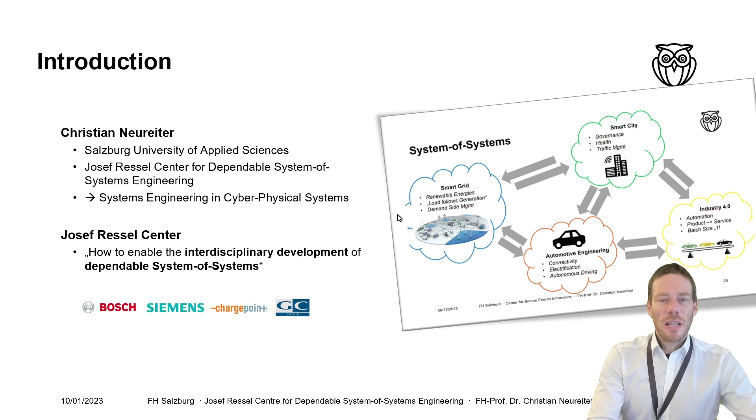The learning goals for this particular lecture are to understand the motivation behind it, so why are we thinking about how to develop dependable smart grids, and what are the challenges. Then we would like to introduce some fundamental concepts like model-based systems engineering as methodology, or mindset even, and the smart grid architecture model as theoretical grounding of all this work. The third learning goal is that you understand how we are going to apply the SGAM for smart grid architecture development.

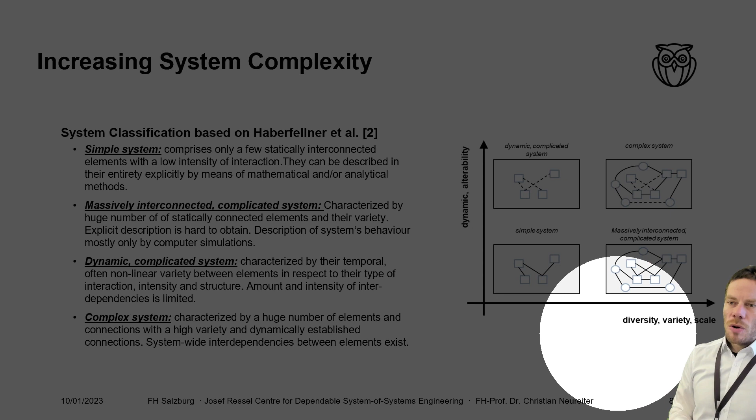On one hand, they consider dynamic and alterability of a system, meaning do we have a stable system structure, or a topology that changes while in operation? The second axis is diversity, variety, and scale, meaning we consider the size, amount, and diversity of the constituting systems. On this basis, we can separate between four different systems: simple systems, two different types of complicated systems—the massively interconnected ones and the dynamic ones—and finally complex systems.

I'm talking about this because this is not just a scientific classification, rather this is a fundamental separation that should guide us in choosing our development approach. This means the classification of a system is the basis for selecting how to approach the engineering task.

For example, let's consider a simple system—let's say we have an electric circuit, like a low-pass filter or an oscillator. Then, with analytic engineering know-how, we are able to make a prediction on some bandwidth frequencies or anyway.

So the idea is, if it's a simple system like a small electric system, we have engineering know-how and we can deal with it. But if we think about a bigger system, like the whole power grid, then probably it's pretty hard to make an exact calculation on the exact voltage at the outlet right now with two digits after the comma.

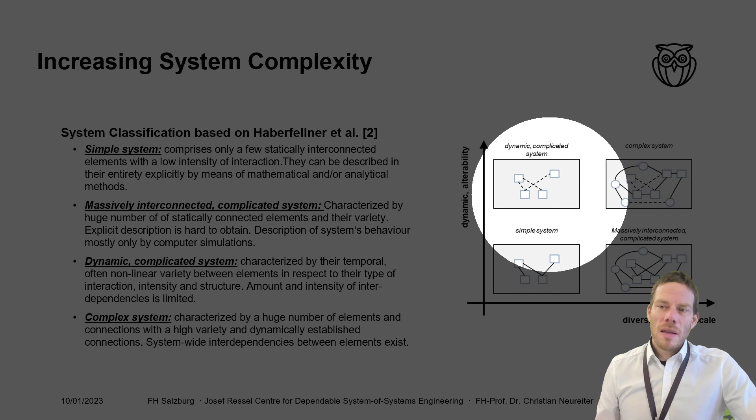If we go in the other dimension, we could think about an ICT-based system where we have mobile clients communicating with a server. The difference to our power grid is that the power grid, as we know it today, has a pretty stable structure, so it doesn't change every day where the wires are drawn. In contrast, our ICT-based system, like a mobile phone with an app and a backend server, has permanently new connections and disconnections of existing connections. So our structure is not stable in that context.

That's what we call a dynamic system, where we have to consider different changes, like load balancing, update services, and so on. Again, the classification of the system helps us indicate the challenges we have to face. Now, if we consider our power grid again, and assume we have dynamic connections as well, like electric vehicles connected one day and disconnected the next, or even the significance of individual connections, like how much energy is produced from some renewable source, then we are approaching a complex system, which raises the question of how to deal with complexity.

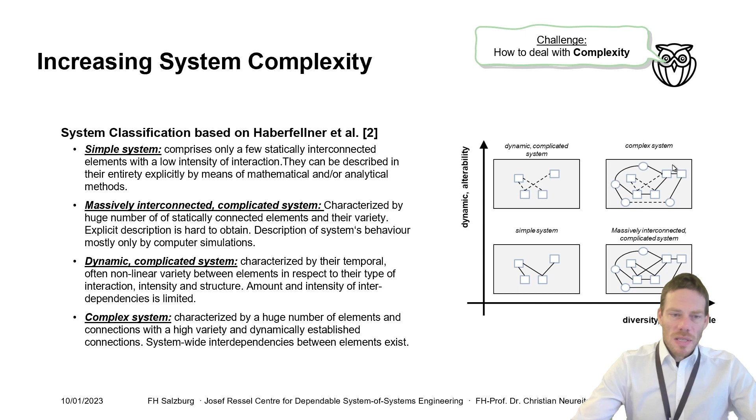To make it a bit more challenging, the example I've chosen, the power grid, is not only a complex system, rather it can be characterized as a system of systems. And the system of systems as such is characterized by the so-called Maier-DeLaurentis criteria. So the idea is that we have individual systems, like for example a power grid and a vehicle.

These two individual systems agree that together they would like to achieve a higher goal. For example, let's say we want to improve our environmental protection. We would like to increase the share of electric vehicles, and we would like to achieve a better utilization of the power grid to enable more electric vehicles to participate in the grid. Now, that's our superordinated purpose - we would like to improve the grid as a resource to enable more vehicles to be part of this game.

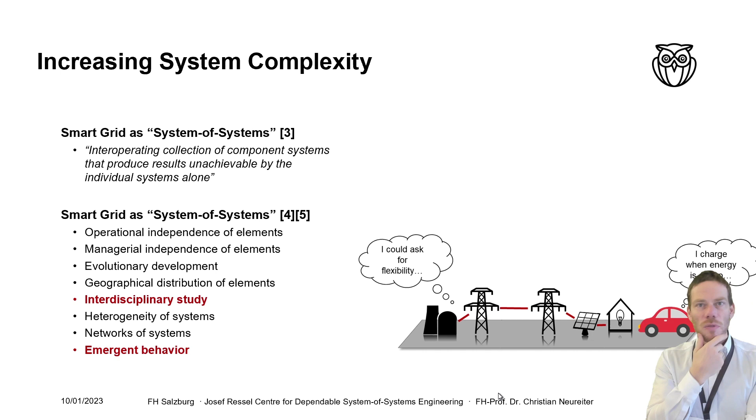So the power grid and the electric vehicle have to move to the side a bit. They could decide on something like, let's use flexibility. The power grid says, when I see that I'm running short of my grid resources because too much power is consumed or something, then I could ask some of the participants in the grid, like the electric vehicle, for flexibility. And the vehicle on the other side says, if I'm connected in the evening at my parking lot, I only want to be fully charged in the morning, but it doesn't matter if I'm charged at 2 o'clock in the night or 3 o'clock in the night. So I could offer flexibility for a better price.

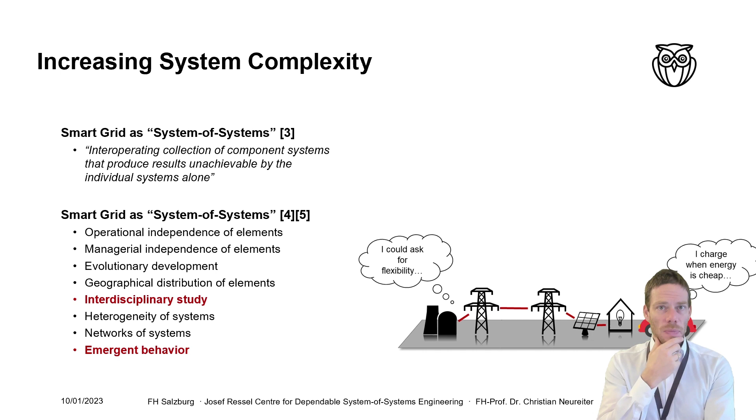So this is the basic agreement between the power grid and the vehicle. The power grid says when I'm running short on grid capacity, I'm asking the car for flexibility, and to motivate it, I will offer a better price. That's what we call an incentive. So we have a good agreement, and that would work to improve grid utilization. But that's only half of the truth.

In reality, let's imagine a scenario like this: let's say it's 6 o'clock in the evening, I come home with my electric vehicle, and I put it to my charging station. The car is charging, everything is fine. Then it's 8 o'clock in the evening, everyone turns on the TV, maybe it's cooking, energy consumption is rising. The power grid says, I have a pretty high energy consumption right now, let's increase the price. My vehicle recognizes the increase of the price and says, I better stop. I make a pause, I go on hold, and I wait for a better price before I continue charging. Everything is fine.

At 8:30, my wife comes back home, and she also has an electric vehicle, and she puts it to the charging station. Her vehicle detects that the price is pretty high at this moment, and it goes on hold, saying let's wait for a better price.

Then at 9 o'clock p.m., my daughter comes home with her electric car. She puts it to the charging station as well, and again her car realizes the price is high and says let's wait. So right now we have 3 electric vehicles attached to the charging station, waiting for a better price.

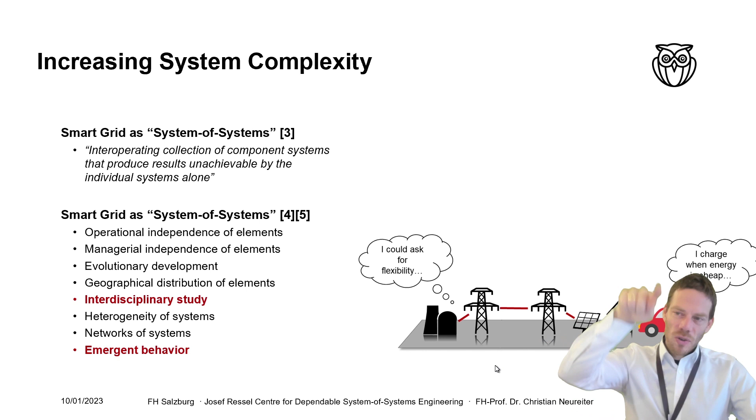So what we see in the end is an oscillating behavior that we definitely don't want in the power grid. This is what we call an emergent behavior—no single producer of this behavior, but it's something we observe in the context of a system of systems. This is exactly what we need to deal with when our system is characterized as a system of systems.

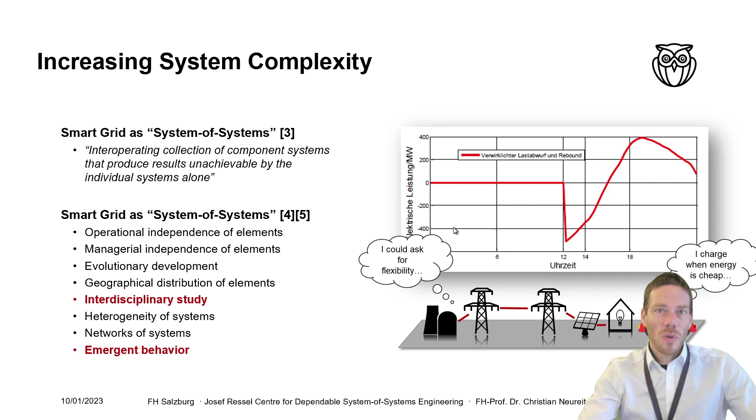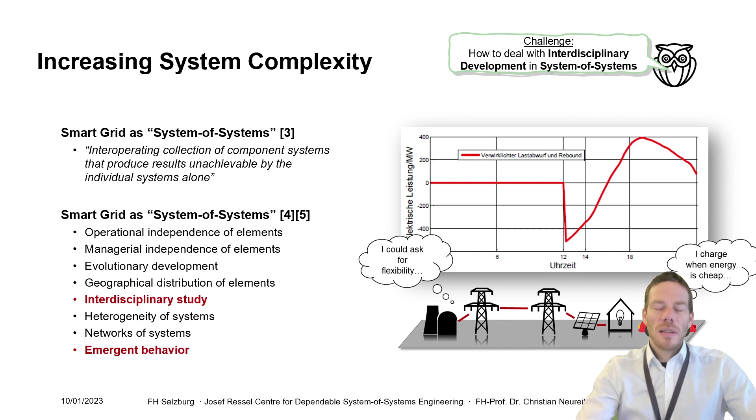Why is it so important to handle this? The superordinated goal, as I mentioned earlier, is that our power grid is a so-called critical infrastructure, and as such it has to maintain pretty strict dependability requirements. Dependability itself is just an umbrella term covering reliability, availability, maintainability, safety, and security. In context of the power grid and many other services today, we also suggest maintaining privacy, or considering privacy like data protection in this context.

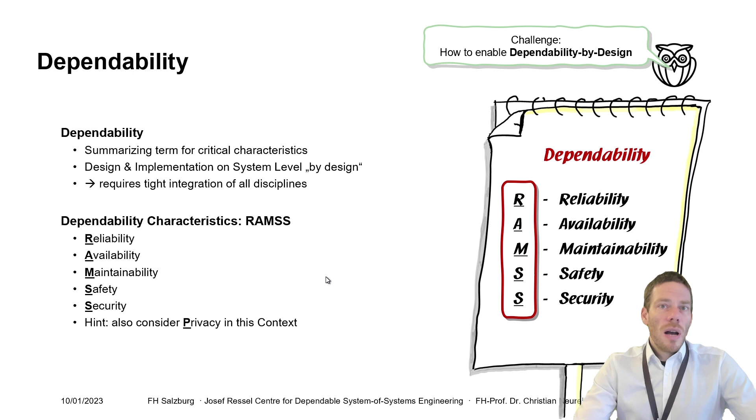So what do we have so far? We have learned that the power grid is a complex system, or even a system of systems, and that this system needs to maintain strict dependability requirements. Now we want to take a look at how to deal with complexity in general, to derive an approach for handling complexity in engineering of power grids.

This can be argued on the basis of something called Miller's law, developed in 1956 by a psychologist from Harvard. He developed a so-called magic number, identifying that our brain has a cognitive capability of around 7 elements that we can process at the same time.

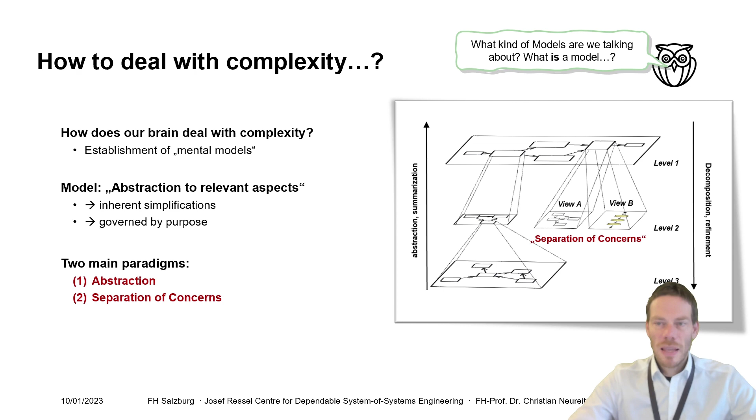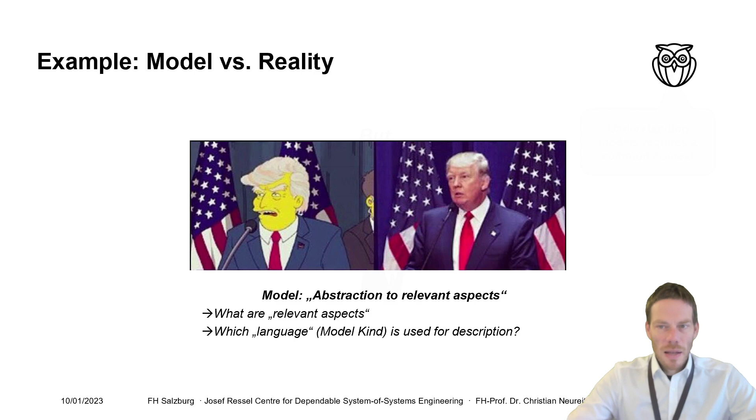To say it, it's Richard Nixon, a former US president, taken from The Simpsons. The first one probably you did recognize, the second one you didn't. And the answer why this happens is that understanding of models always requires a common context.

A model requires interpretation, and the way interpretation works depends on the context. The context could be, in an engineer's case, your age, your daily experience. Donald Trump plays a role in the daily news, not so much anymore, luckily, but Richard Nixon doesn't play a role. So in our life context, Donald Trump is recognized, Richard Nixon isn't.

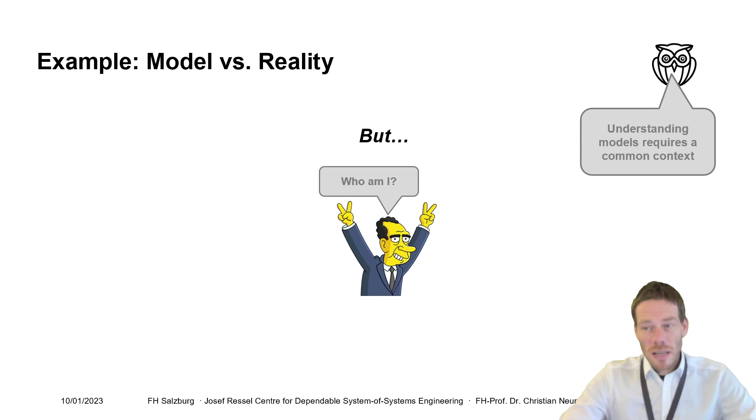And the same thing is true for technical models. If we think about engineering models or models in general in the smart grid, we realize that there are many different models being used. We have physical models like electrical models, or control systems models, architecture models, maybe UML and SysML. We have maybe some enterprise architecture, some context models, and so on.

But what we already can draw out of this is that whenever we want to apply modeling to deal with complexity, we first need to answer the question: which types of models are suitable to be used in the different contexts that we see here? Or is it possible to find one model that is usable for everyone?

So we already learned that models are a good approach to deal with complexity, but now we have to answer the question, which kind of models, which type of models? Is it something new, something everyone needs to learn, or how can we approach that? To answer that, I first would like to go to the whiteboard and make some initial discussion on some fundamental aspects of technical models. So let's move over to the whiteboard.

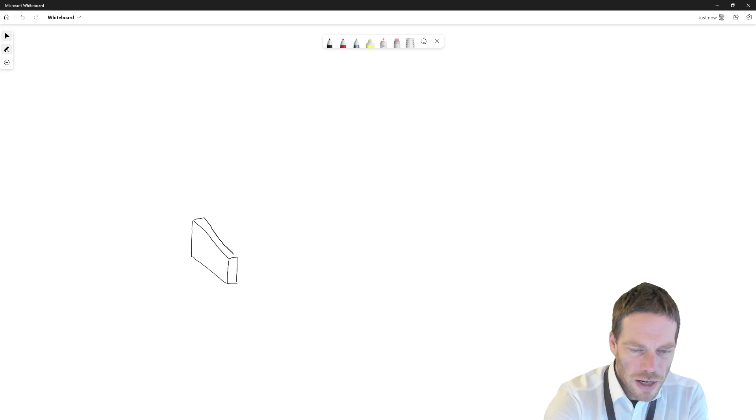I just make a sketch. It's already a model—it's the abstraction to relevant aspects. Not very pretty, but I think you get the idea. And this is a wall. Now we want to understand how much energy we lose.

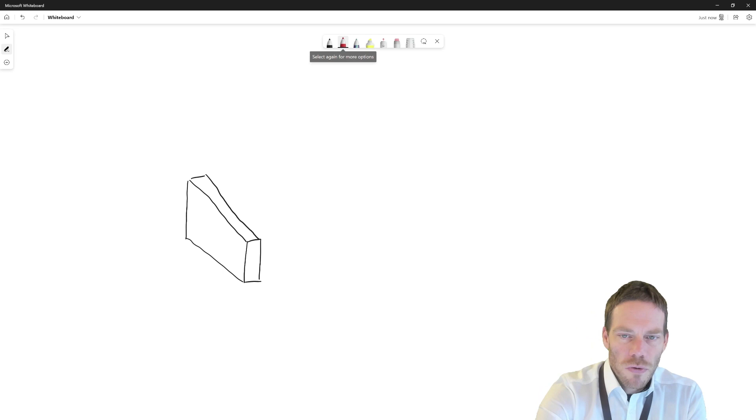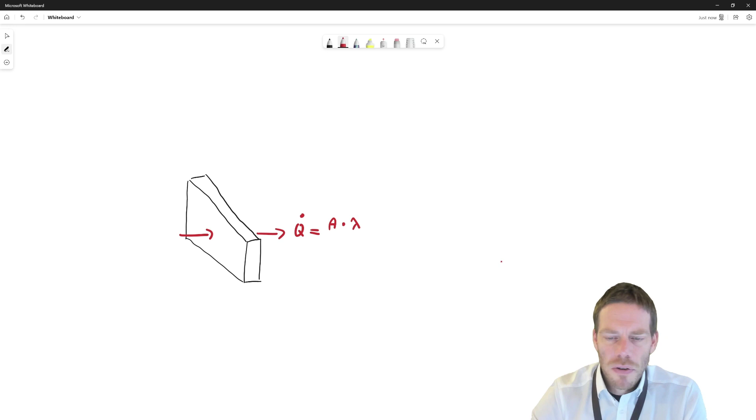First of all, we need to find the cause-effect principle, which in that case is a stream of heat going from the inside to the outside. Now we need to understand how much energy we are going to lose. A specialist, a civil engineer, could say the value or amount of heat we lose is determined by different factors: the area of the wall, some material-specific constant, some disturbance here which is the delta of the temperature, and maybe the thickness of the wall could play a role.

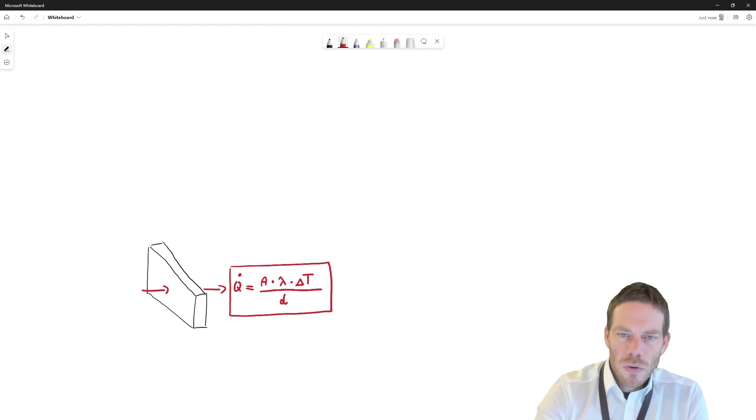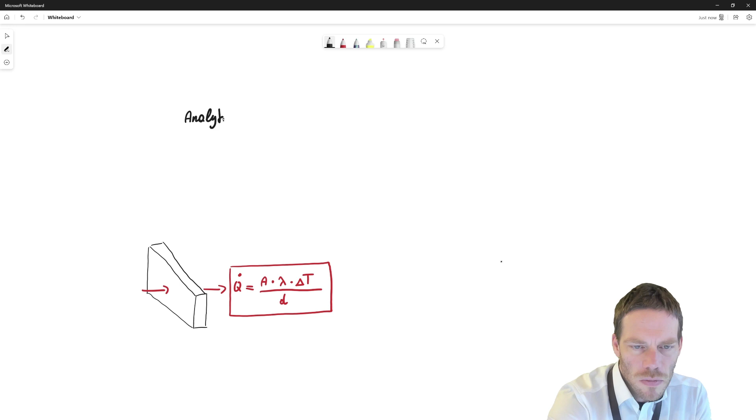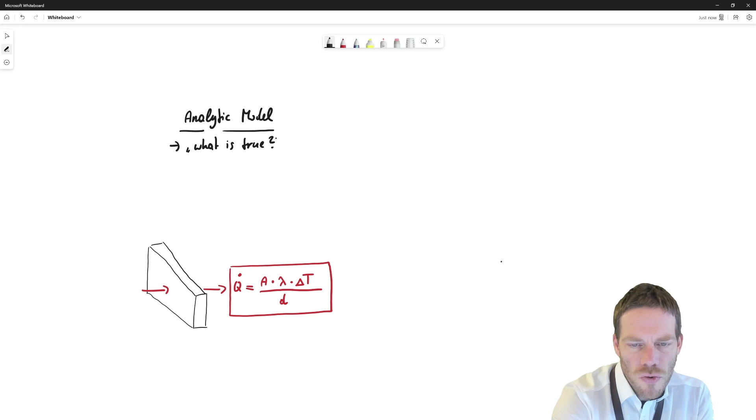And all in all, now we have a model of how much energy we're going to lose. This type of model that we use here has a name—it's called a so-called analytic model. And this analytic model tries to answer the question: what is true? True in the meaning of, is my model representing reality?

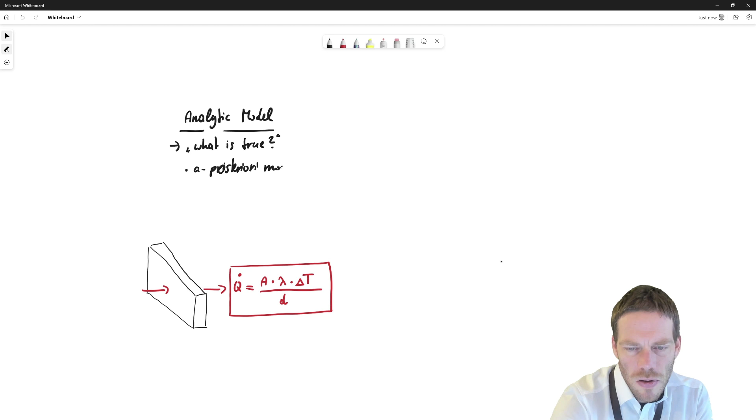So I propose a model, and then I can verify it in an experiment, or rather go into a simulation. That's how we are developing our analytic model. This type of model is also called an a posteriori model, because it is established after an effect already exists—we try to describe an existing effect. You also can call it a so-called descriptive model.

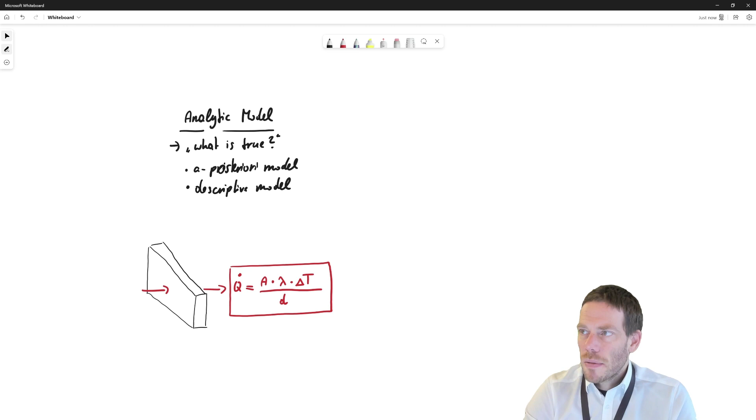As it describes something, okay? And that's the one thing. Now let's move on.

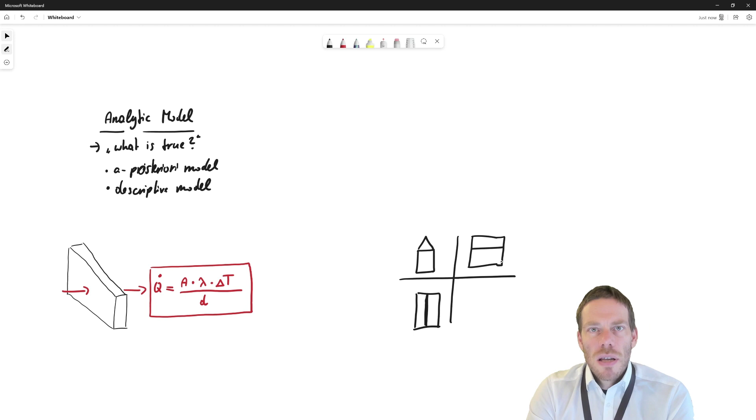This model brings us to the question: can an architecture be right or wrong, true or false? The answer is no, because we find different architectures that would fit the same purpose. So we cannot judge if the architecture is right or wrong, we can just judge if an architecture meets our purpose, and that's what we call the effectivity.

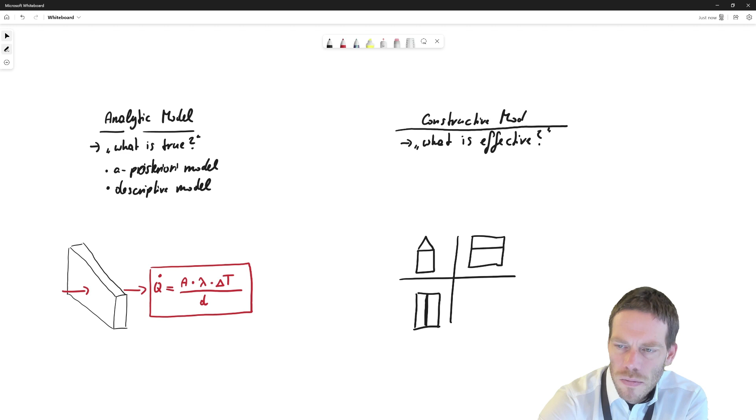As there is a creational task involved, we plan to create something, and for that purpose we make a model. This one you also could call an a priori model, because the model is created before our artifact is built, or a declarative model, because it's a declaration that everyone involved in the construction needs to follow.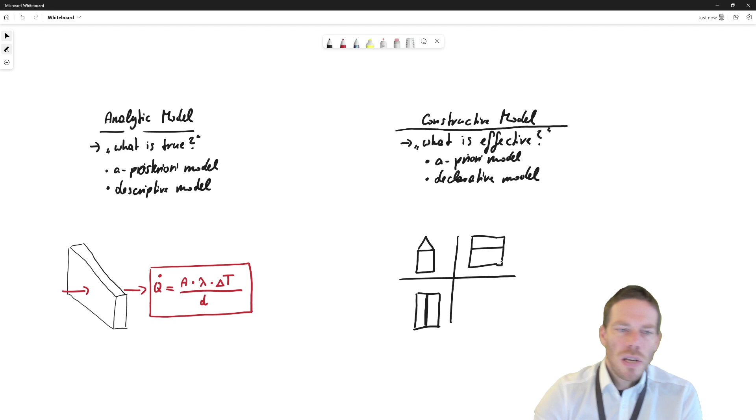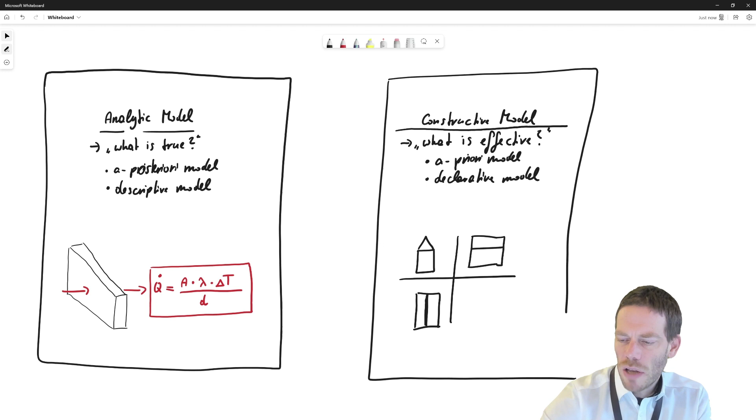So what we found here already, on basis of the simple example, is the fact that we have two different types of models that are used during construction. And if we think back to the question for the architecture: is the architecture good or bad? Does it meet our goals? Then how can we understand if this particular architecture is good in terms of energy efficiency? Is there a lot of energy going out through the walls or not?

The answer is very simple, because we can simulate, for example, our construction plan in respect to its thermal behavior. And this simulation is nothing else than the application of our previously developed analytic model. So we already see the following: we have different types of models here. We have the analytic model that helps us understand the particular cause-effect relationships, and we have the constructive model that is the basis for our plan, so what we want to build. And there is an interaction...

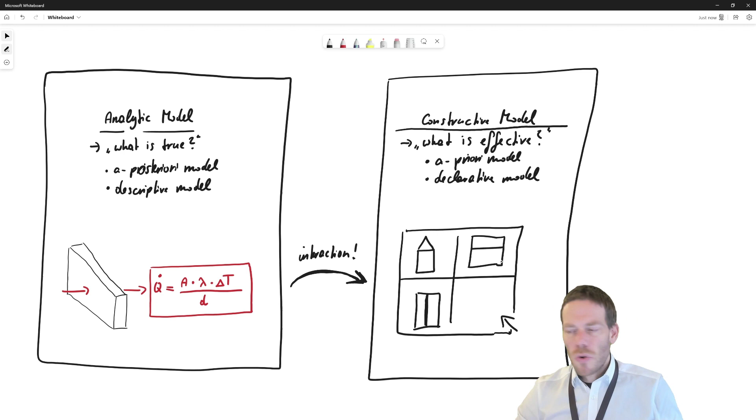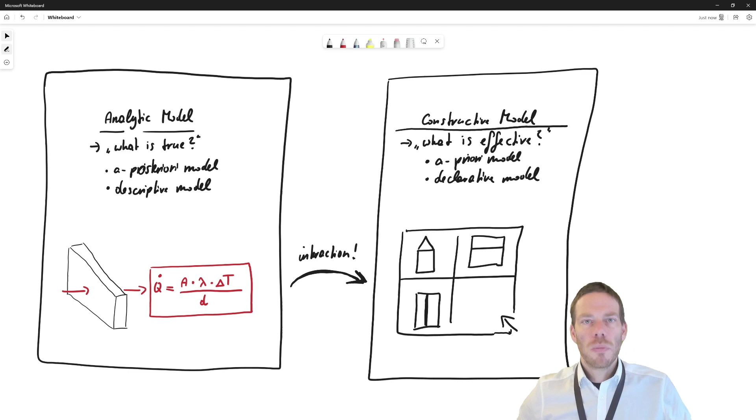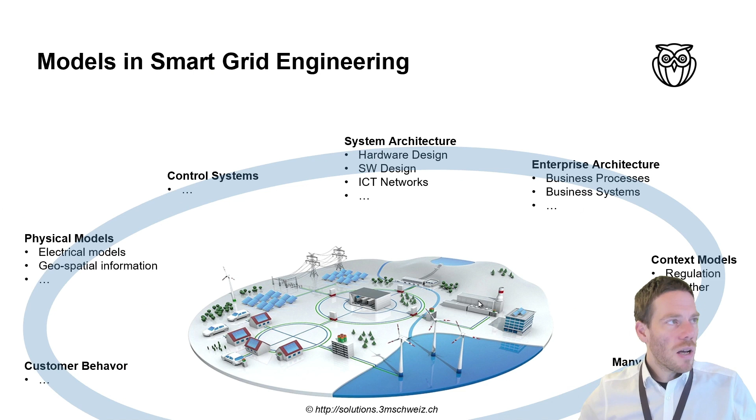...between the different models. So this already indicates something very important: probably, even though models help us dealing with complexity, it's not about having one model. Probably it's about having different models and finding their interaction. And with this knowledge, let's take a closer look at how such an interaction could look like.

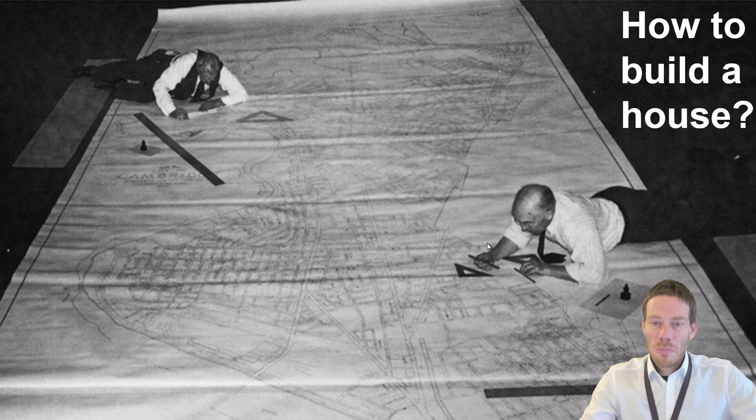To identify how something on that level could look like, let's go back to the analogy of how to build a house. You remember, in ancient times, people were planning houses or cities like this. Today, typically, we are no longer drawing with pen and paper; rather we are using CAD, computer-aided design tools. And here, maybe we can find some answers. So let's take a look at how modeling of buildings works.

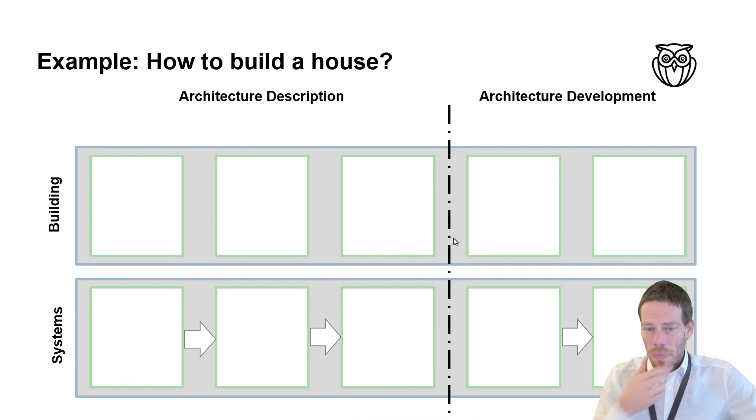First of all, what we need is an agreement on different views that are needed for the development of our houses, like, for example, as we mentioned before, the architecture views in the house cover typically the front view, the side view, and the top view, roughly.

And further, we want to integrate different aspects depending on the particular concerns. Like, for example, we could use some models for electric wiring or for the installation. And these symbols follow a particular terminology - that's what we call a model kind. So we have the views already, which build the frame, like the top view, and then we have the integration or the depiction of the views on basis of model kinds, which is a common agreed taxonomy. And in the end, we don't want to use pen and paper because that comes with some difficulties.

Like, for example, let's assume we have this house and now we want to change this particular wall - this would be the thickness of this wall. This would require us to find every single picture where this wall is depicted and change the thickness in every single picture, like here, here, or here. And with 3 pictures, this is pretty simple. But in a real project, if you have 300 or 3000 pictures, then drawing could be pretty difficult.

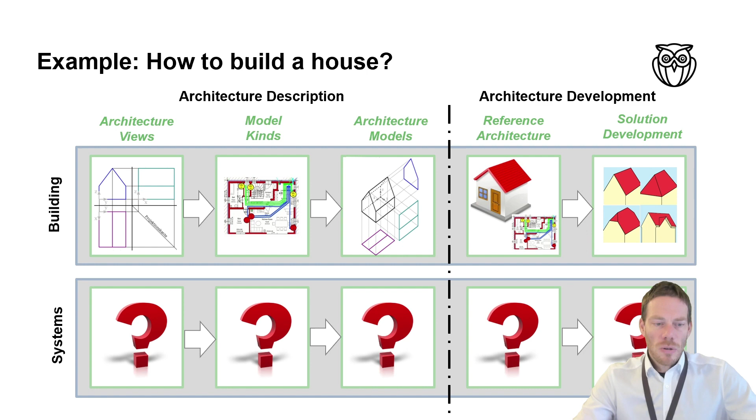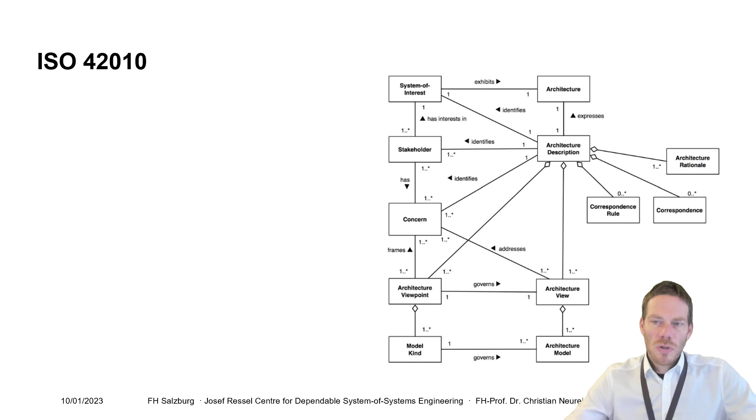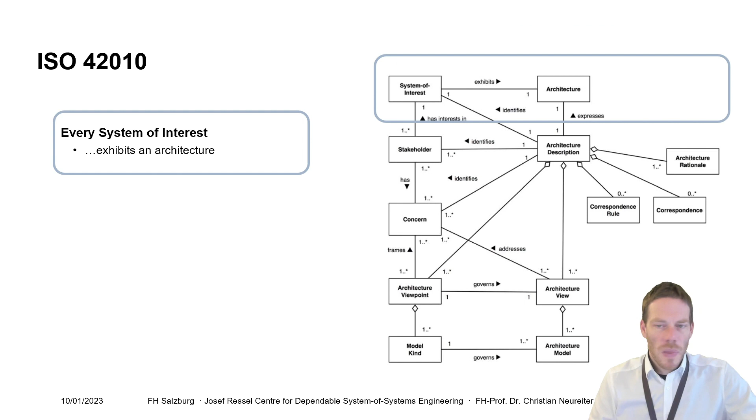And this picture in a more formal way can be found in the ISO 42010, which is basically the ISO standard for software and system architecture. And this gives us a very good indication how we could proceed on the search for such a model. So first of all, what we agree on is that we have a system of interest, and every system of interest has some particular architecture. The second thing is we raised the question how to describe our architecture. That's exactly our question. And then we can follow this path.

We understand that our system of interest has particular stakeholders. And every one of our stakeholders has a particular concern. So we need to understand what is everyone interested in. And on this basis, we can specify a certain architecture viewpoint, and we can further elaborate which language do we use to illustrate this viewpoint. This could be a set of graphical symbols, such a model kind.

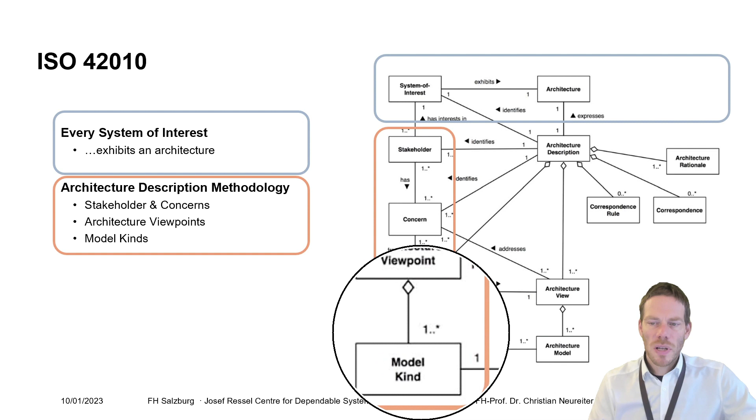For example, if we go back to our house, we could say I have the stakeholder who is the electrician, and our electrician has the concern - he wants to know where to put the wires in. So I specify there is a viewpoint: electric installation. It's a chapter in a book or whatever. And the description of this viewpoint, the realization of this viewpoint, is based on a certain model kind, like the standardized symbol for electric elements used in construction.

And so we made a declaration how we are going to describe architecture on basis of the particular stakeholder needs that we have. And in the realization then, the particular design takes place, which is based on an architecture description. And this architecture description comprises different views on basis of the described viewpoints. And every view comprises a set of models.

In that case, it could be a set of electric schematics. They follow the notation specified by the model kind, like the standardized schematics and symbols that we know for an outlet or a light bulb or a switch.

Yeah, and that's the way how we proceed. That's the guideline how we can start identifying models for the smart grid. So in our case, this means what we have to do now is think about, for our system of interest, the smart grid, which stakeholders do we have and what concerns they come along with, and how could we start depicting these different concerns. And that's what we do in the next chapter.

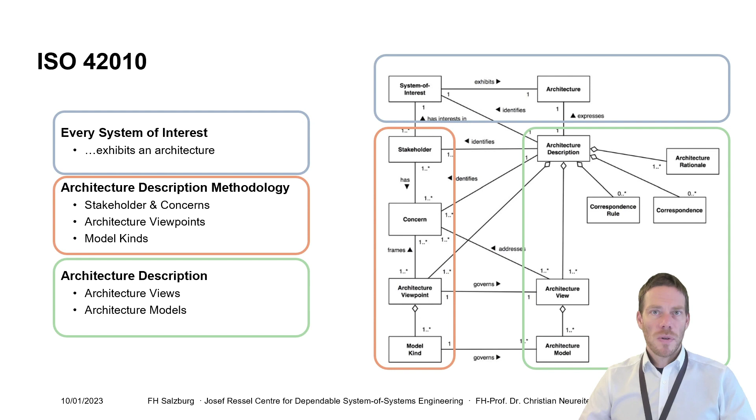Everyone who ever tried to develop a domain-specific language knows that the most difficult task is to find a common concept for communication. So if you have many stakeholders and maybe their communication is slightly different, then this can be a pretty tough task to be solved.

In the case of smart grid, when the quest is to find a common concept for communication, we have a lucky punch because we don't need to find or elaborate individual concepts, because we are very lucky to have some concepts that originate from standardization bodies. And this brings the benefit that it is already agreed on. So we don't need to discuss if we make it one way or the other. If we have a standard, then we already can say, okay, that's the basis for communication.

So let's take a closer look at the smart grid architecture model, because this is something that can serve as a basis for common communication.

So first of all, let's talk about the background. The background is coming from the idea that when in the smart grid, the electric domain and the telecommunication or ICT domain are being integrated, then probably it's also a good idea to align the standards from these two domains to make sure we don't have gaps in standardization or some contradictory standards. So just to ensure that the standards are compatible with each other.

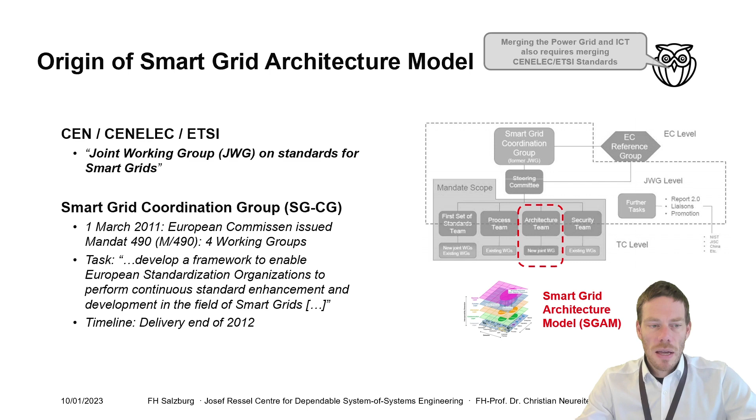First of all, we had one concern, which was the decomposition of the problem domain, the power grid. For this decomposition, the guys from this working group referred to the NIST conceptual model, which is the basic and well-agreed decomposition of the power grid. So we have generation, transmission, distribution, and in the end, customer premises. The guys in the working group added one more aspect, distributed energy resources. This is the only change they made. But basically this is the decomposition of the power grid from the huge bulk generation down to the customer.

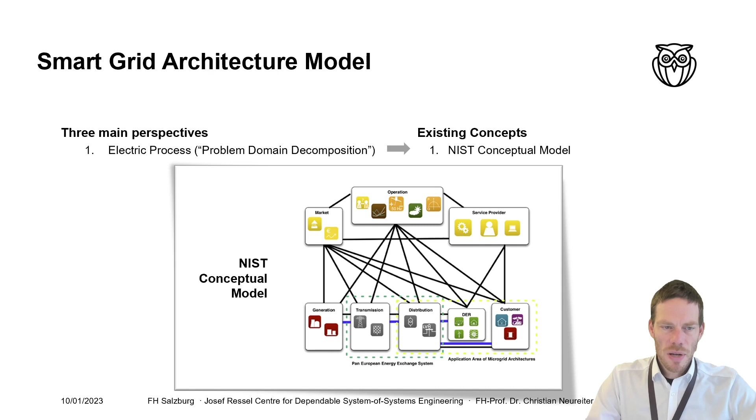Then in the NIST conceptual model, there were three operational aspects: service provider, operations, and market. And this aspect of power grid operation, how to control this electric infrastructure, has been further reflected on the basis of the so-called SCADA automation pyramid. This automation pyramid is a very widely spread concept from industrial automation, and it separates the different stages of process automation.

So what we have is on level 0, we have the sensors and signals that are close to the process that we want to control. We have programmable logic controllers, which are pretty close to the process. Then we have a superordinated SCADA HMI, then the manufacturing operations management, and the enterprise resource planning and logistics. So that's the typical topology that we see in automation technology.

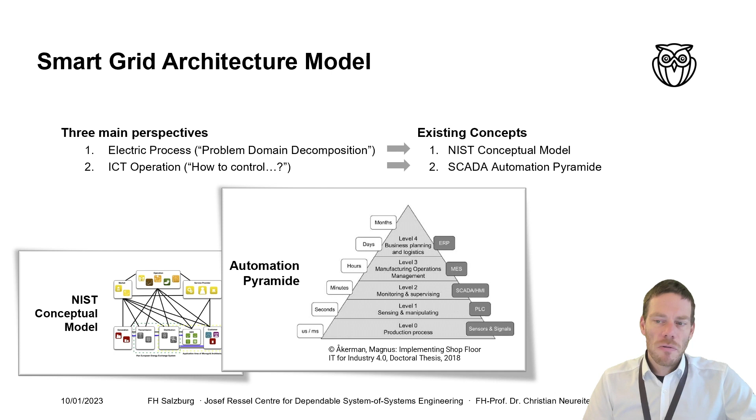And the third aspect considered in this context is the question of interoperability, which means how to make sure that two components in the power grid will be interoperable with each other. Here they use the Gridwise Architecture Council's interoperability stack, which basically states that interoperability needs to take place on different levels, like the basic connectivity - physics, network and syntactic interoperability - all the way up to regulatory policies and economic codes. If you take a closer look, you will find some similarities, for example, with the ISO OSI stack.

The idea of considering interoperability on different stages is nothing new, that's well established. And well established is already one of the key aspects here. All of these three aspects that state the basis for consideration are well established, so you probably won't find many people in the energy domain that would discuss any one of these things and re-ask if that's a good thing, because they are established, they are working, and most people are familiar with it. So this looks like a good basis for developing an architecture reference framework.

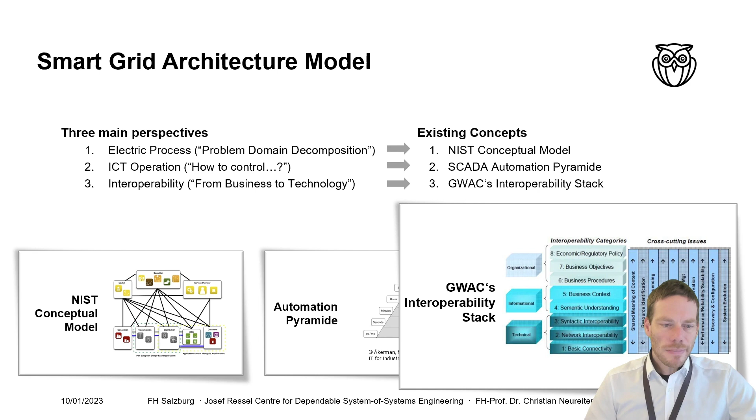Let's take a look at what people from this working group did. First of all, they combined the NIST conceptual model with the automation pyramid. If you take a look at the outcome, it's the smart grid plane that you can see right here. In this smart grid plane, we have a grid pattern which on one axis decomposes the power grid from the huge generation down to the customer premises.

That's the process that we want to control, the energy conversion chain. And here we have the control axis, which is basically the hierarchical level of power system management, meaning the ICT-based equipment and human interactions that are controlling all these individual systems. These two things combined, the process we want to control and the ICT that is controlling this process, there is already value inside.

Because what you can do now is take any equipment in the power grid that you have and align it inside this grid pattern. By having a particular position inside the grid pattern identified, you can already draw conclusions like, for example, on this side we probably have a higher need for security, and on this side we probably have a higher need for privacy. So the position inside the grid pattern indicates requirements for your systems.

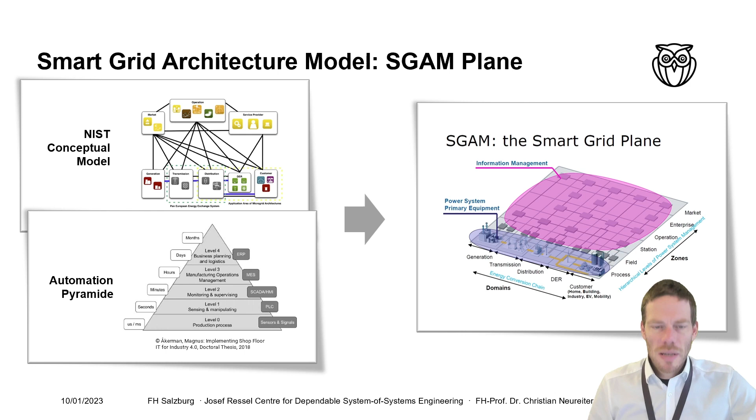The last thing missing now is the topic of interoperability. We want to ensure that if, say, company A makes this element and company B makes this element, there is compatibility between them. The last thing the guys under the mandate from M490 did is they added the GWAC's interoperability stack with a bit of digestion, and they finally stated that interoperability between two elements must be given on 5 layers, which means of course the physical components need to be compatible, and the communication layer must fit, using the correct and same protocols.

Then we have the semantics layer, the information layer, which ensures interoperability of the data models being used. Then above we have the functional layer, meaning the functional interaction needs to fit. On top of all that is the business layer, which guides the business objectives or political regulation, making sure two systems will face the same regulations and nothing contradictory.

With this, what we already have is one common picture which is used and everyone can agree on. It's very simple, very understandable, and already gives us a good basis for depicting, structuring, or architecting smart grids. Though this one has been made to identify and align standards and gaps in standardization, this framework is already very valuable to structure a whole smart grid application or a power grid.

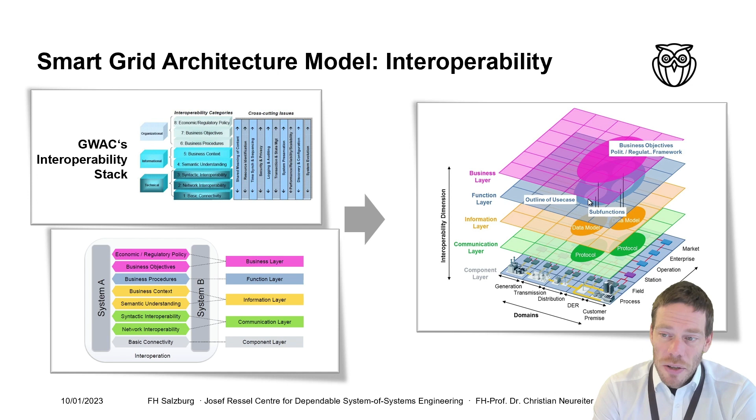The only problem now is that this picture has been created in PowerPoint. So it's an illustrative picture and it's not suitable yet for modeling. We need to approach this step by step in the sense of how we can make this applicable for modeling. First of all, we can already identify three things that we often find in architecture modeling as well. On one hand, we have some business aspects and regulation, which in a broader sense could be considered as an aspect of requirements.

And then we come up with a model transformation to the next one. Here we probably could have a logical or functional model, which describes the functionality that should be achieved by one particular subsystem or the interaction of subsystems of the power grid, without telling us how it is done. So this is the solution-free functional model right here.

And then, as we know it from architecture development, the functionality is further transformed into a technical model, which clarifies which components are used, how they are connected, what the data models are, and so on. So this means we already have a concept which is very easily understood by stakeholders on one hand, and which is already pretty close to typical concepts that we use in architecture development.

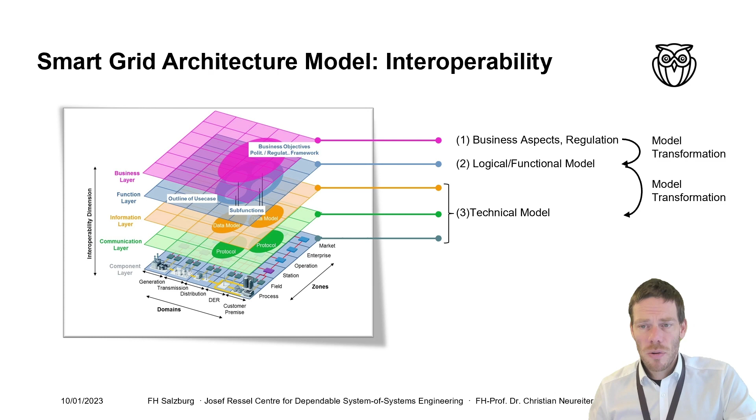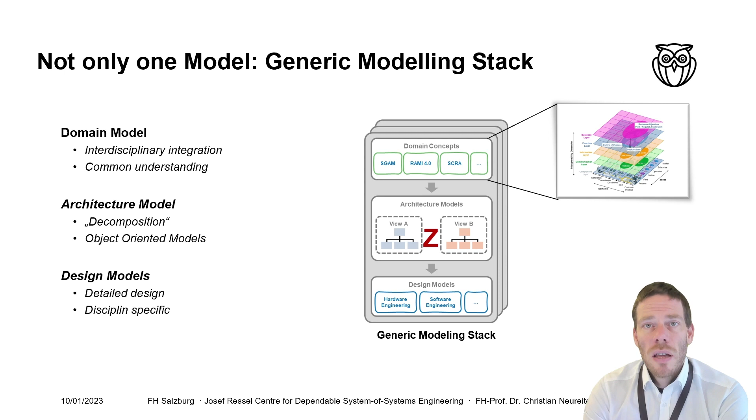Having this in mind, we can use the SGAM now, and we can say this is our common denominator, a common ground that could be used on this level. Furthermore, the elements here probably will already have a pretty good fit with the architectural models on the next stage. So where we end up is we need to take the SGAM as a conceptual idea, as a thought model, and drill it down into a set of viewpoints and model kinds, as we have already seen earlier in ISO 42010.

If we do it, it's a little bit simplified, but here we end up with a modeling stack, where we can see we have a domain architecture model on this level, a technical architecture model on the second level, and down there we have the design models. And we're working on the domain architecture model.

In the domain architecture model, we need to identify particular viewpoints and model kinds to help model the smart grid. If we apply the SGAM now, we could derive three viewpoints: an enterprise viewpoint, which guides the requirements; a functional viewpoint, which guides the functionality; and a technical concept.

Inside these three main viewpoints, we could place some particular model kinds, like the SGAM business layer in the enterprise viewpoint, the SGAM function layer in the function viewpoint, and the remaining three layers, which are technical model kinds, we could allocate to the technical concept viewpoint. So you already see this looks pretty promising.

And we're able to use the commonly understood concept and to derive, on this basis, a common concept for modeling and communication.

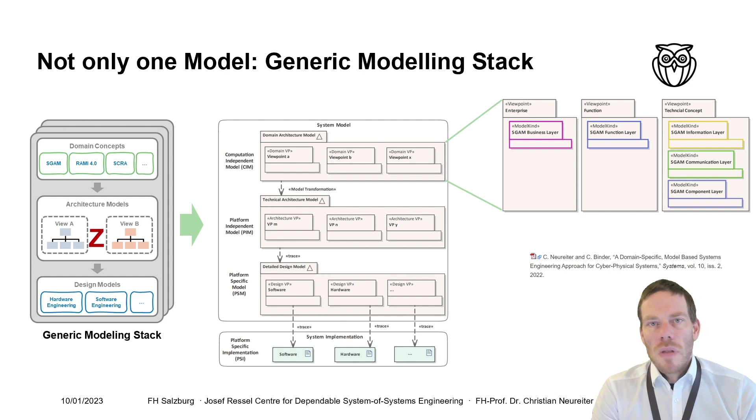Please be aware at this moment that the given model kinds here can be aligned in the viewpoints, but they are not sufficient to develop an architecture. Because keep in mind, the SGAM has been developed for identifying gaps in standardization, and for that reason things like a requirements model or anything else have not been considered. So we can use the SGAM for architecture development, but we need to complement it on the basis of architectural knowledge.

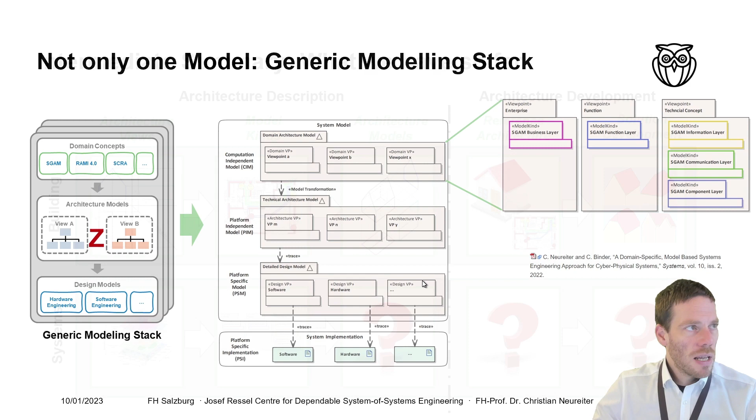So where do we end up with that? Finally we come to the point that, if you remember our big picture of how to build a house, we can conclude that now we have common views. We have identified a common set of views for our stakeholders where people could agree, and we were already able to derive particular viewpoints and model kinds, which is the basis for architecture modeling.

What is missing right now is the answer to the question of how to practically model such architectural models, which reference architecture could be used, and, of course, whether this is suitable for practical applications—do you have practical experiences?

Yeah, that's it for today. The remaining questions will be answered in the next lecture.

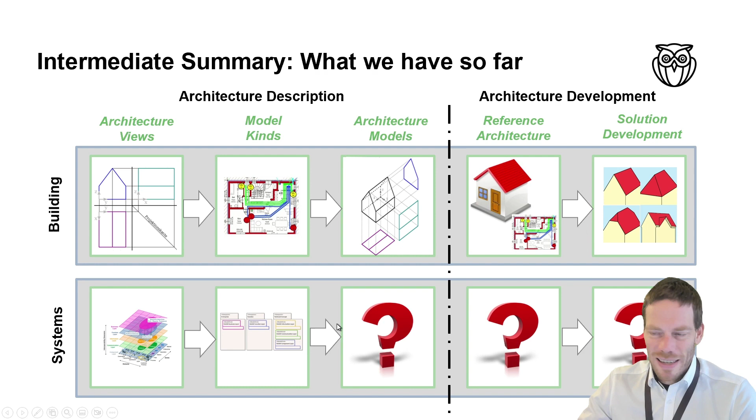So to conclude the things from today: again, we have an understanding of the motivation. We learned about complexity as a challenge, and we learned about models that could be a good answer. We understood the fundamental concepts of SGAM, and we have already seen how SGAM could be used to derive particular viewpoints and model kinds in alignment with the generic modeling stack.

And that's where we are done for today.

Next time we will answer the following questions: how to make it practically applicable in a modeling approach, and how could we build a reference architecture, so which elements should we use. I also would like to share some insights from real-world applications, because this concept has already been applied in different industrial projects in different countries.